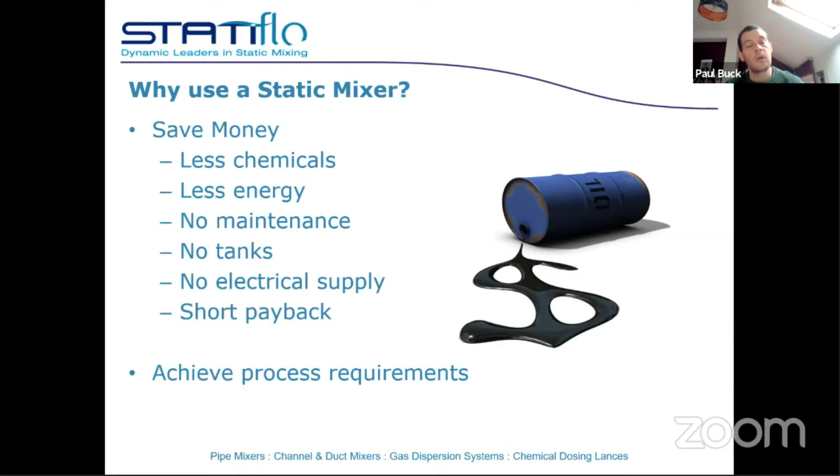Overall as well, it helps achieve the process requirements. By using a static mixer, you will better mix your chemical into your water, or your gas into your water, and you will achieve the process requirement quicker. So overall, there's a benefit there.

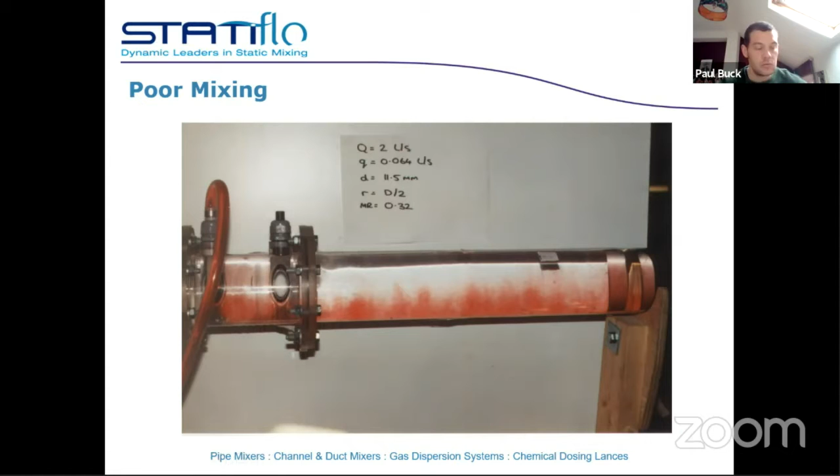Right, what we're demonstrating here is poor mixing. If you don't use any form of static mixer or gas dispersion system to mix your liquid or gas into the water, what tends to happen is you get poor mixing and chemical overdosing. So what we're demonstrating here is we're injecting a red dye into the pipe, and you can see the dye has dropped to the bottom of the pipe, with no mixing happening at the top. Overall, this is an inefficient system requiring more chemical consumption than when using a static mixer.

Now, focusing on this slide here, we've got two different images. Image one on the left-hand side is without a static mixer.

Without a static mixer, the red dye we've used is clumped together in the middle of the pipe and not properly mixed throughout the water. On the right-hand side, we have an image with a static mixer, and you can see that pipe is a nice even red colour through the full cross-sectional area. The static mixer has completely dispersed the chemical throughout the water, reducing chemical consumption and achieving your process requirements.

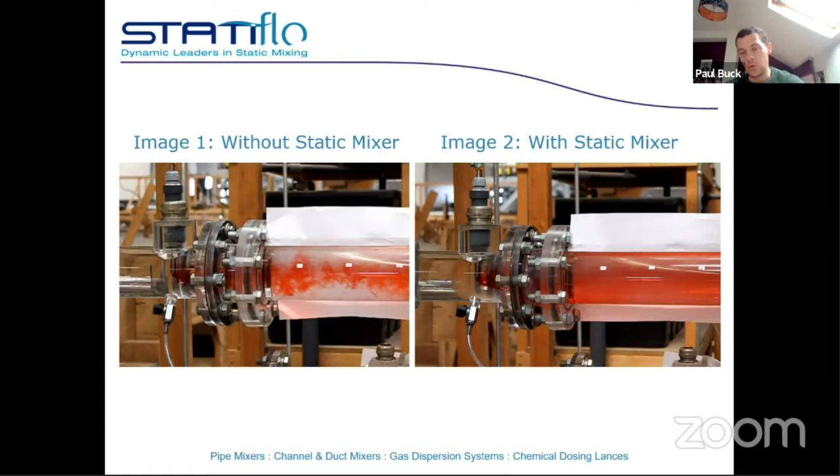Now, this is where you can use static mixers on different applications on a water treatment site. You have initially some pH control, so potentially acid or alkali being dosed. Then your coagulation phase, ferric sulfate, alum or PACl, you can use a static mixer there to mix these chemicals into the water. The gas dispersion system we're going to come on to shortly could be featured in two separate locations: aeration for iron removal, and also for ozonation. We're going to go into more detail with regards to the gas dispersion system for ozonation.

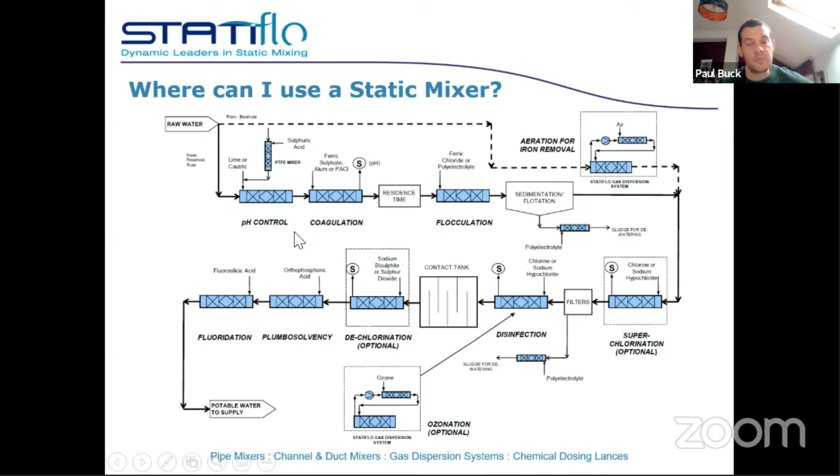Various other different mixers as well. We have mixers for polyelectrolyte into sludge, for sludge dewatering. Going into the disinfection stage, your static mixers can be used there as well for mixing your disinfection chemicals in, whether that be an actual chemical or an ozone gas. And then a few different applications depending on what part of the region of the world you are. Fluoridation is not done everywhere, and plumbosolvency, so orthophosphoric acid, is not also done everywhere.

Right, how do static mixers work? So the clue is in the name with static mixers - there are no moving parts in the mixer itself. The way that the mixer works is by flow division and radial mixing.

You can see on this slide here, on the left-hand side, we have a helical twisted mixing element. What this is doing is splitting the flow with the first mixing element, so 50% of the flow travels down this side, another 50% down the other side, and you get radial mixing happening at each element interface. The next mixing element is offset 90 degrees, and then flow division is happening again. So as well as the flow division, you get radial vortices created at each element interface, which also assists the mixing. So it's flow division, radial mixing.

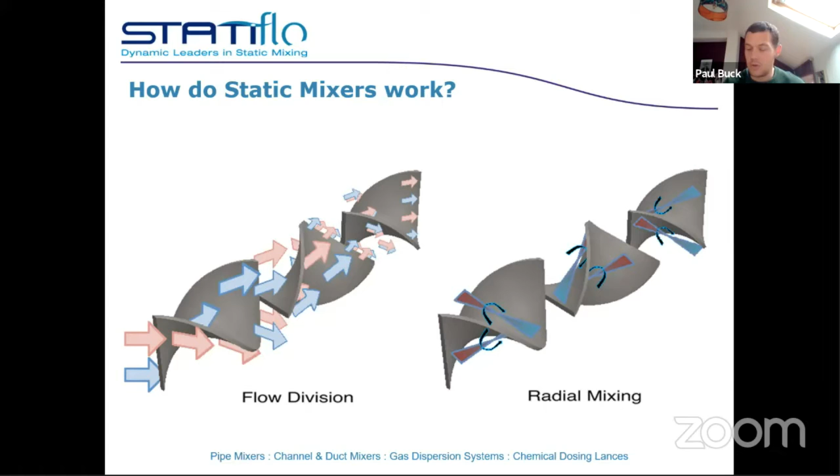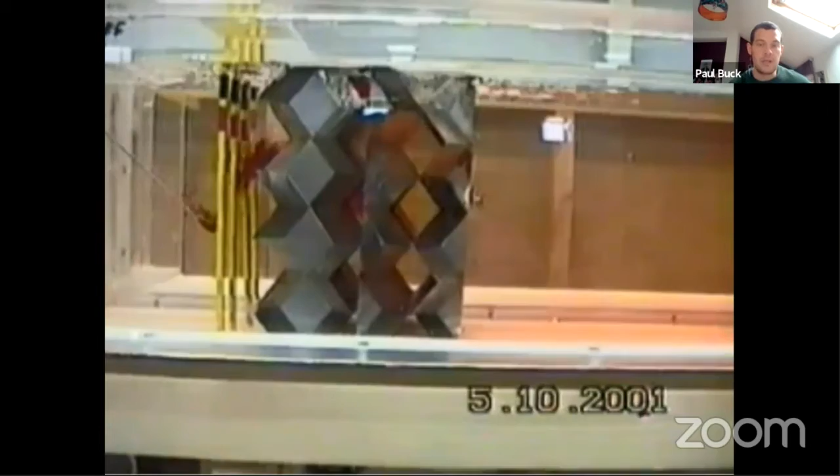Now I have actually got a video that I'm going to play here. This is just a demonstration video of how static mixers work in their performance. We've used a red dye again to simulate the dosed chemical. If I press play on this video, hopefully this works okay with the slight time lag. Normally the chemical will be dosed via the yellow injection lances at the upstream end. But what we've done here is just randomly dosed the chemical at different locations just to show the performance of the mixer is still very good. You can see a slightly better angle as the camera pans up here.

So that's your overall process. You can see the mixer is not moving itself - it's relying on the flow of the water through the mixer to divert that chemical, split the flow, and create radial vortices.

Right, what we're going to focus on now is some information with regards to ozone gas, and then specifically we're going to move into the gas dispersion system. So I think we've got an idea of how static mixers work now. Ozone has a very high oxidation potential, double that of chlorine, so it's very effective against a wide range of fungi, bacteria, and viruses. Ozone generators are also becoming more efficient - historically the power consumption was very high, but they are becoming more efficient. So ozone is being looked at around the world for disinfection purposes, as an alternative to chlorine. CapEx and OpEx costs are also lower than ever with regards to ozone systems as well.

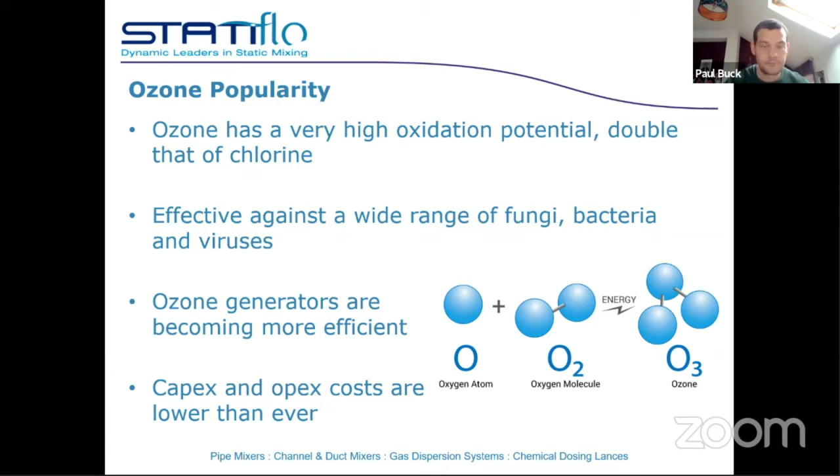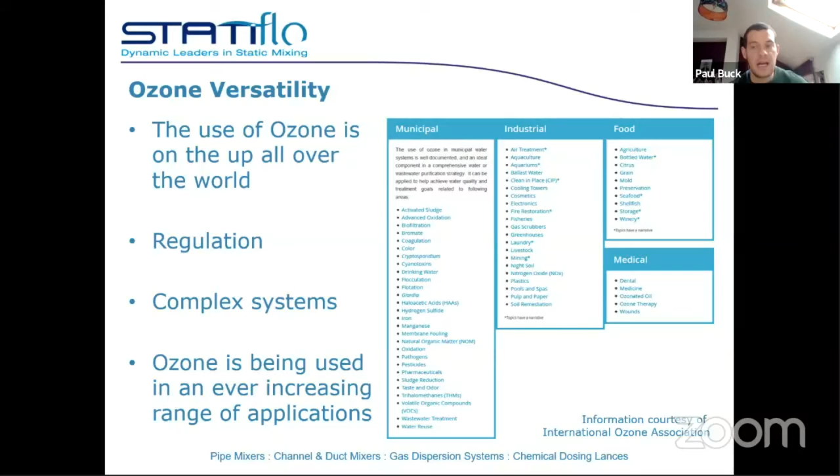It's important to have a good system to introduce your ozone gas into the water. Now what we're going to focus on here is some information on gas liquid mixing.

To start off with, if you were just going to use a standard static mixer, it provides a high shear rate, and the bubbles decrease in size as they pass through the mixer. You've got your main water flow rate, your ozone gas is introduced, and the bubble size decreases slightly with each mixing element, so the terminal bubble size is achieved at the mixer discharge. With a gas liquid mixing application, we're shearing the gas bubbles down to a small size, giving a higher surface area, and achieving greater mass transfer efficiency.

With just a standard single pass system, you do need quite a lot to generate that bubble size. One of the main advantages of the gas dispersion system is it takes off a proportion of the side flow, which is re-injected back into the main pipe.

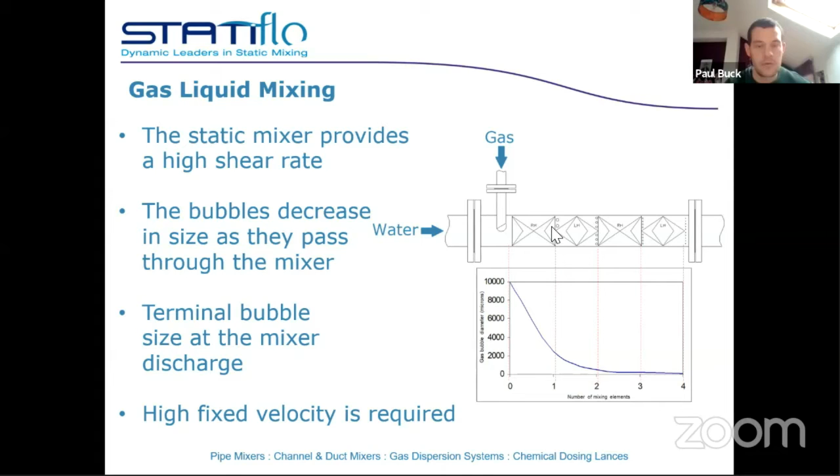If we just skip through to the next slide, this is what we're actually featuring here - our gas dispersion system. I'm going to talk you through the actual components of the system, and then there's another video that will play which will give you an idea of how the system works in operation.

As I mentioned previously, it's a two-stage static mixer system. You've got the main water flow rate, then roughly about 5% of the main flow is taken off via the side loop, with duty standby pumps positioned here. If one of the pumps fails, you can quickly switch over to the standby line. The purpose of this pump is purely to draw water from the main flow rate. Then the gas is introduced via a venturi.

The ozone gas is drawn in under low pressure. Then we have our first static mixer - remember, this is a two-stage static mixer system. The first static mixer shears down the gas bubbles to a small size, so you've got small, evenly sized gas bubbles, which are re-injected back into the main pipe where there's an additional contactor static mixer, distributing the gas bubbles over the full cross-section of the area. So, a two-stage mixing system here.

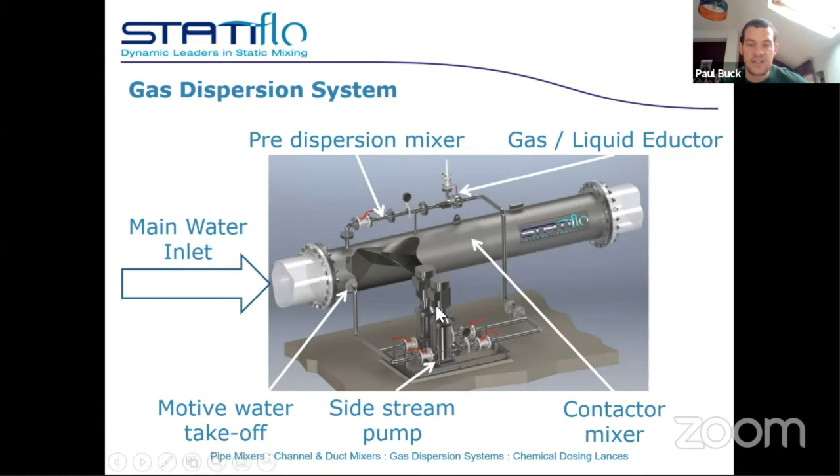Now what I'm going to do is play this video, because this will give you an overall idea of how the system works. I do hope that this video runs in real time - it may be slightly slow, but we'll see. I'll play the video anyway.

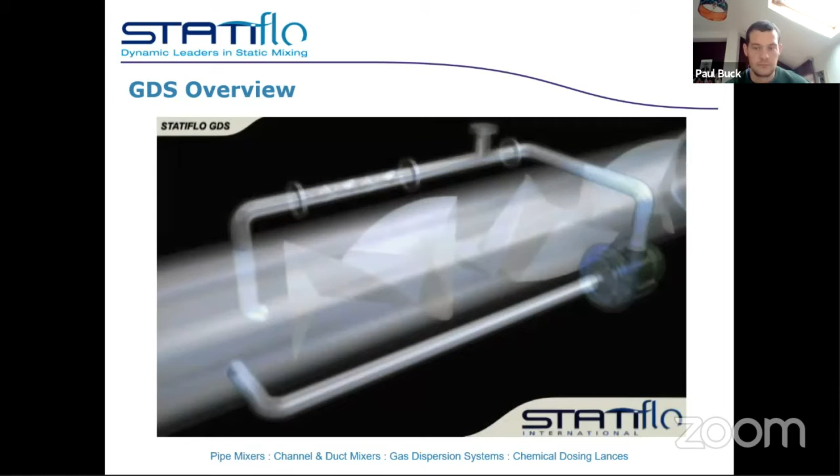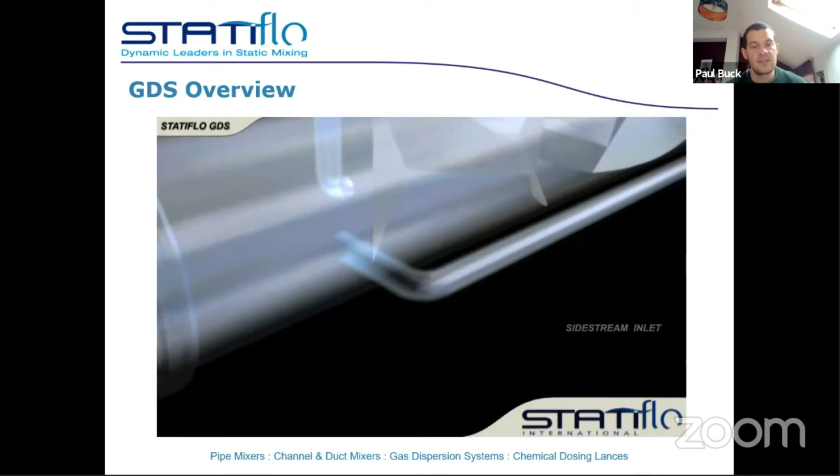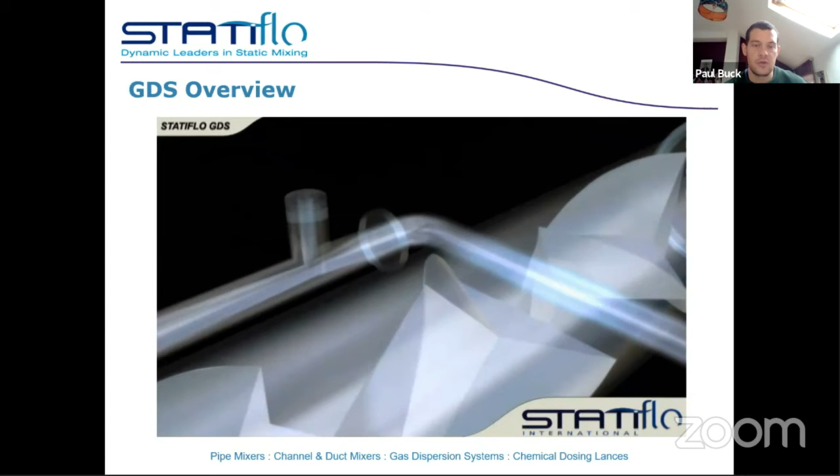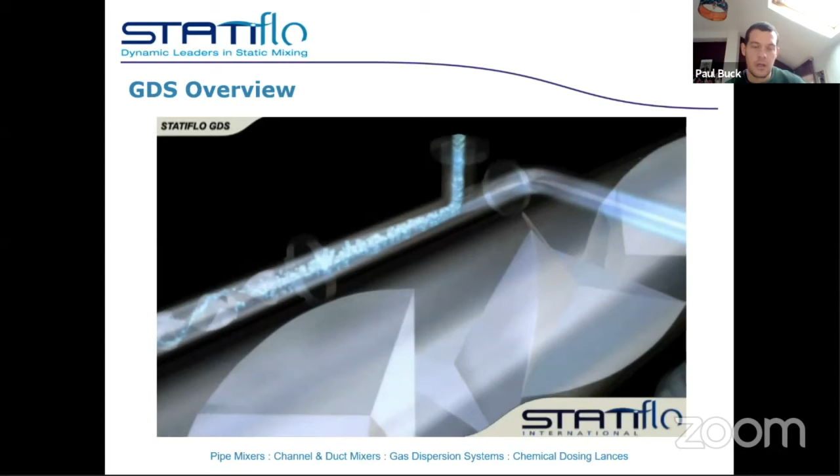So let's say main flow rate, then about 5% is taken off via the side loop, via the pump, if you remember from the previous slide. Gas is then introduced into the system via this gas venturi - the ozone gas. You can see we've got quite large, inconsistently sized bubbles. Then we have the pre-dispersion static mixer, which shears the gas bubbles down to a small, uniform, even size.

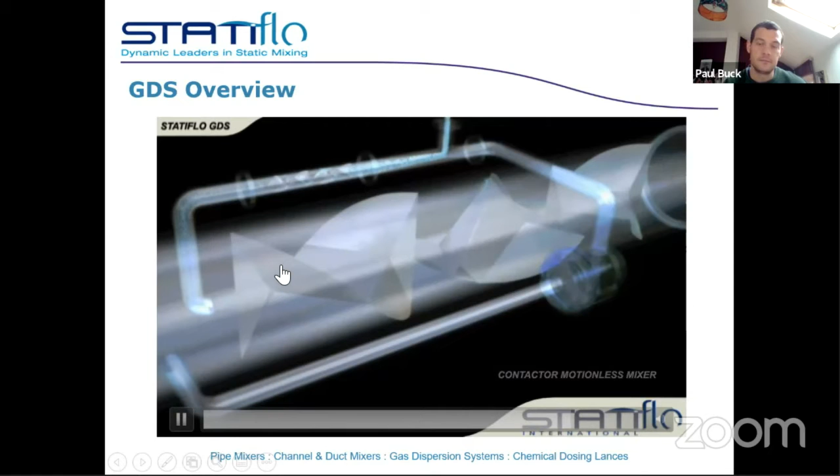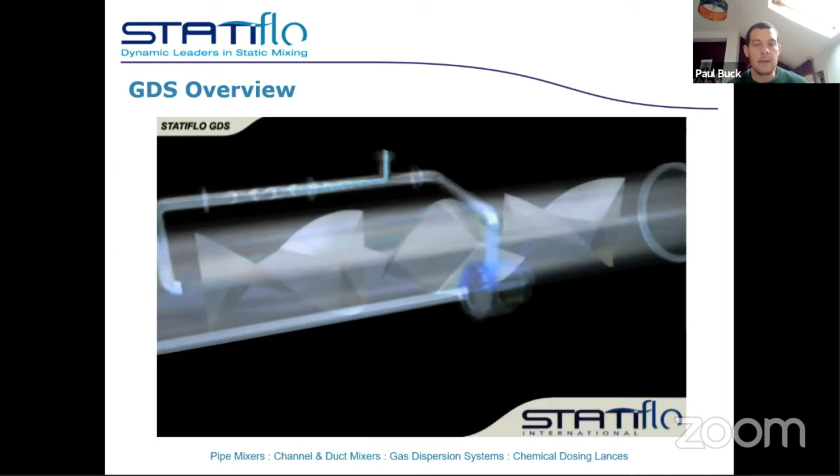Then this gas liquid rich side stream is re-injected back into the main pipe, into the main contactor, where there's an additional larger static mixer, mixing that gas liquid rich side stream into the full volume of water. So, a two-stage system. One of the main benefits is the gas bubble size can be maintained even with large variations in the main water flow rate. We're also achieving very small micron bubble size, so the mass transfer efficiency for the gas dispersion system for an ozone application is guaranteed at 95% - obviously a very high mass transfer efficiency.

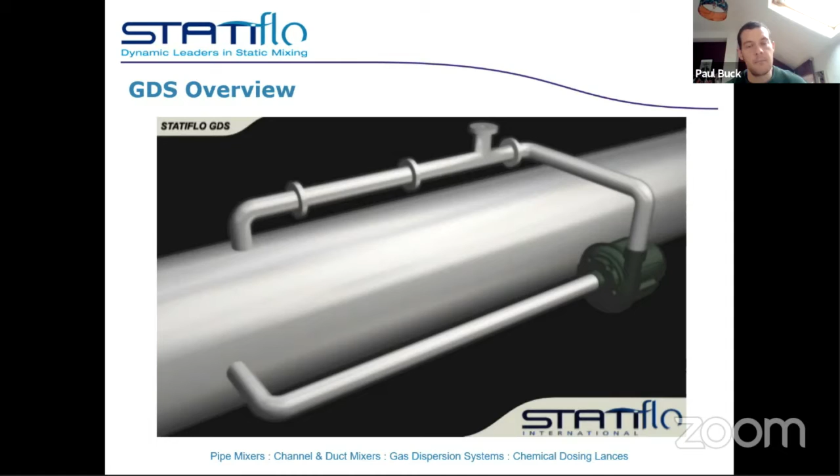Now, the way that the pre-dispersion mixer works, I'm just going to play this - there's another video embedded in here as well. This is how the static mixer shears the gas bubbles down to size. I'm going to play the video here. It's an animation, but it's a true concept.

You can see larger gas bubbles coming in, and they are broken down and sheared down via the static mixer elements, giving a consistent bubble size at the mixer discharge, leading to a higher mass transfer efficiency. I'll just play that one more time - you can see larger gas bubbles coming in, and they're sheared down to a small, evenly consistent size at the downstream end.

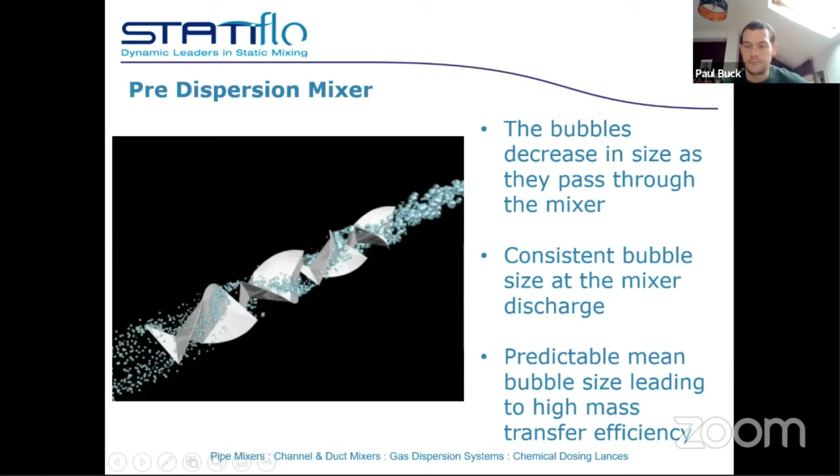Right, what we're going to look at now is some alternatives to the gas dispersion system. You may be aware of some of these alternatives here.

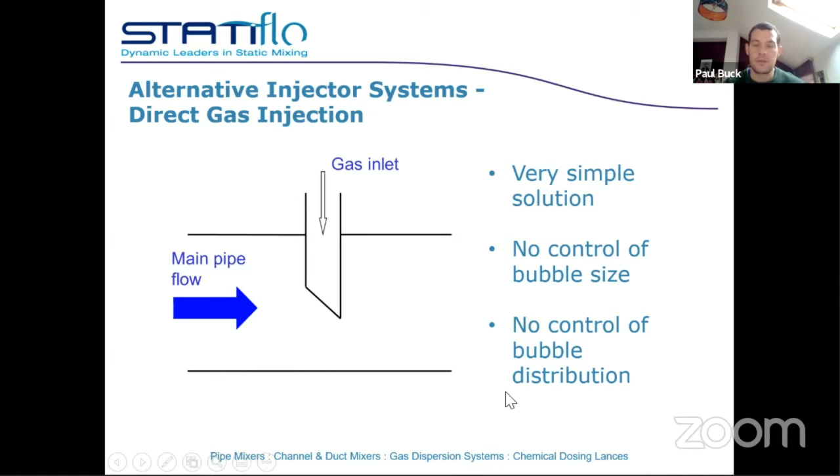Firstly, to start off with, there's direct gas injection without any static mixer. This is a very simple solution. There's no control over bubble size, and no control over bubble distribution. What tends to happen is the gas is introduced and goes straight to the top of the pipe, bouncing along it. That's a very inefficient system - you'll have water at the bottom of the pipe not being treated, giving a low mass transfer efficiency. Overall, quite a poor system.

The second alternative to the gas dispersion system would be gas diffusers. These are fairly basic solutions with no moving parts. They do generate relatively large bubbles. There's no mixing because the bubbles just rise directly above the column where they're released. The bubbles also recoalesce as they're released from the diffuser, and as soon as they recoalesce, they travel to the surface quicker, so you get a relatively short contact time.

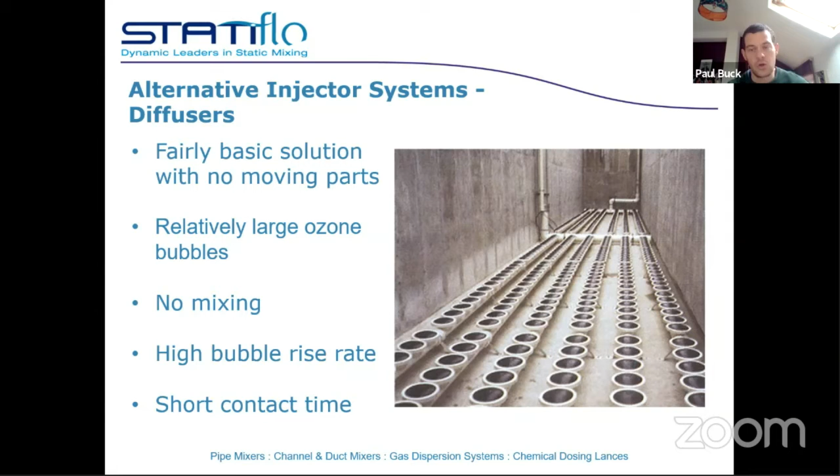Let's go on to the next slide - you'll be able to see what I'm talking about with regards to some diffusers. The bubbles released here coagulate together and rise very quickly, so you've got areas of water here, here, and here which aren't being treated. The bubble size also varies depending on flow, unlike the gas dispersion system which has a constant fixed bubble size. Diffusers also require quite high maintenance - the diffuser domes can become blocked with dirt and sediment, and they need regular shutdowns and acid wash requirements to keep them clean and functional.

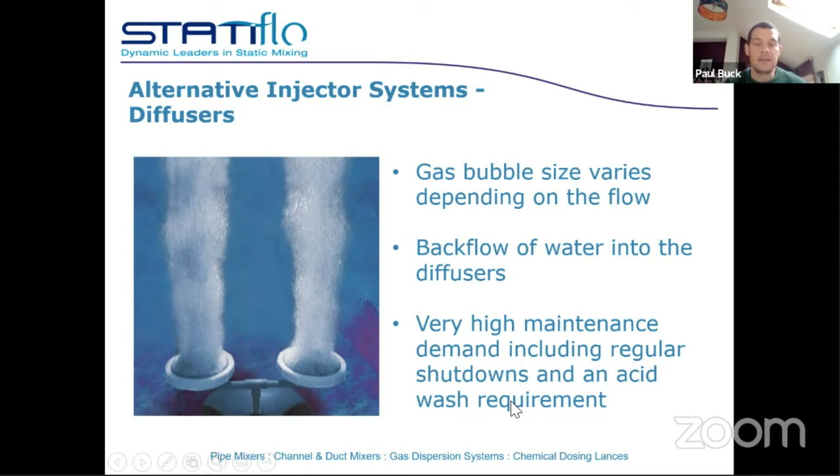Right, what we're going to look at here is a case study - gas diffusers versus the Statiflo gas dispersion system. This was a customer that contacted us in the Czech Republic in Europe. They had an ozone system using a diffuser bed. The initial mass transfer efficiency was 80%, but this dropped to approximately 60% after 6 months of operation. They weren't happy with the drop, because that meant they had to generate more ozone gas - a more expensive system to operate.

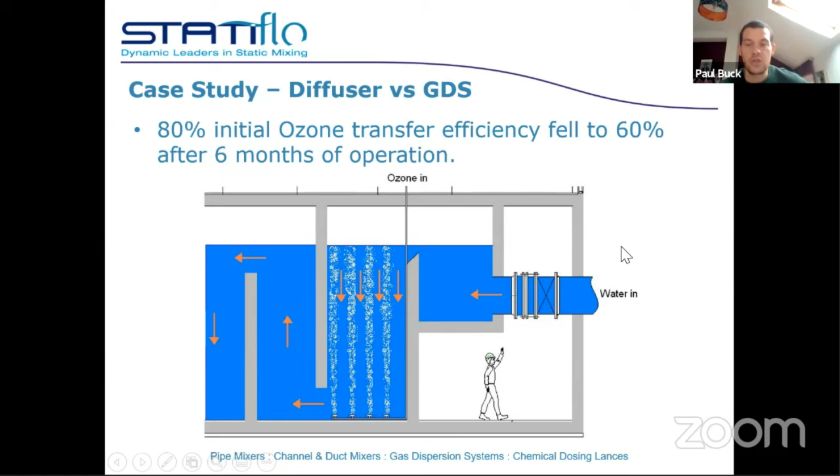So they contacted us about installing a gas dispersion system. What we did is come along and install it - the bones of the system were put in this chamber here. You can see that is your water takeoff, there is your pump, and you have your pre-dispersion mixers positioned here, followed by the secondary contactor static mixer. We also included stainless steel baffle plates here to increase the residence time through this chamber.

The mass transfer efficiency increased to 98.5% using the Statiflo gas dispersion system. This resulted in an ozone electrical generation saving of €150,000 per annum. So the customer managed to save that amount just by increasing the mass transfer efficiency to 98.5%, compared to the previously inefficient diffuser system.

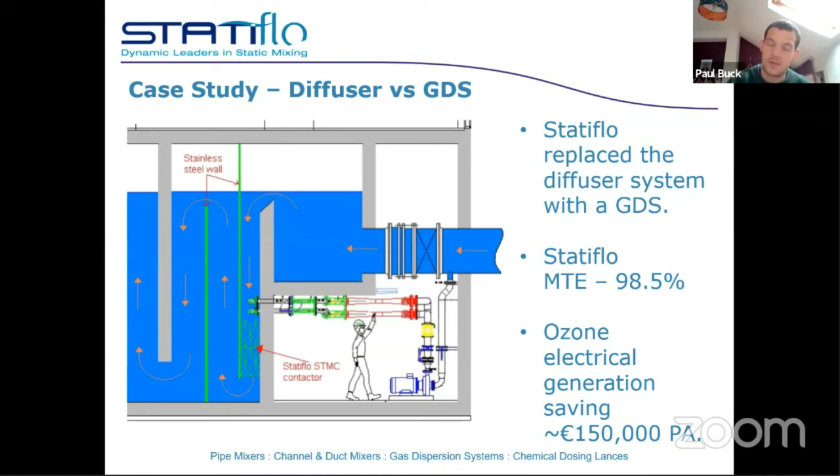This is an image of an installation in Spain. Just to give you an idea, the pipework can be mounted in various different options. There's a manway there just to check for blockages - this isn't always required, but you can see you've got your takeoff points there. There were 3 duty loops required on this system, so there's 3 pumps, pre-dispersion, static mixer, and then re-injected back into the main flow right there.

So, GDS benefits to recap: you get high performance over a wide flow rate range. Irrespective of the main flow rate through the main pipe, if this flow drops to be very low, the system will still perform very well because it has an independent side loop that runs at a fixed flow rate. So even with a drop in the main flow, you'll get high performance over a wide flow rate range.

Excellent transfer efficiency - we guarantee 95% based on good contact tank design. The lowest recorded mass transfer efficiency has been 98.3%, always higher than that 95% guaranteed figure. Overall, quite a low pressure drop as well - there is a pressure drop overcoming the main contactor mixer, however this is normally quite low. We can also tweak the design of the gas dispersion system to offer lower head loss, for example by making the mixer a bit longer to drop the head loss pressure drop.

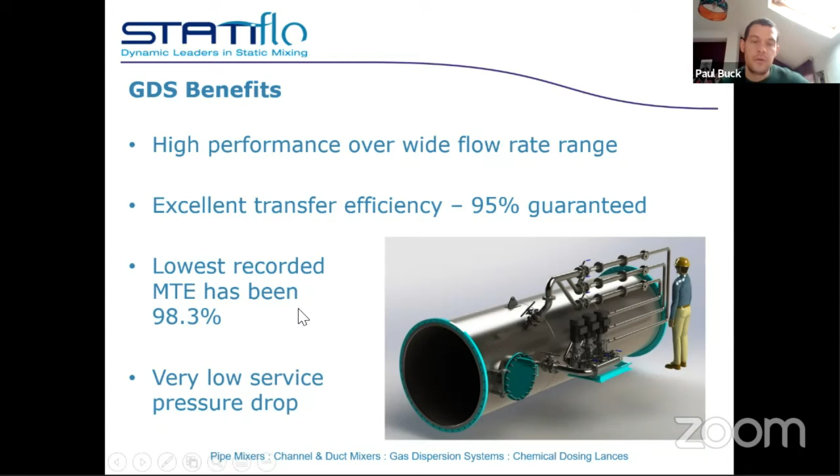Just some benefits continued. There's no deterioration of performance after prolonged use, unlike diffusers, which do deteriorate in performance over time. For a gas dispersion system, there's no deterioration over time. Everything is fine to be operated for a continuous period of time.

There's only one moving part, and that's the pump. Apart from the pump, the system has no other moving parts. That can be duty only, or we can have a duty standby pump. These are always quite low energy consumption pumps in comparison to a jet mixing system, which will have much higher power rated pumps. The gas dispersion system tends to feature a low energy consumption pump just to draw that water off. But all in all, it's very low energy consumption.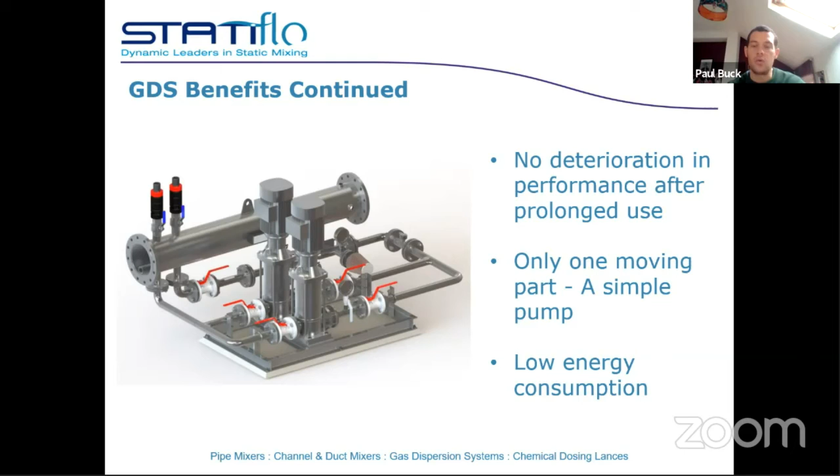It's worthwhile mentioning that the Statiflo gas dispersion system can be used for AOP, advanced oxidation process. AOPs can reduce the concentration of contaminants from 100s of ppm to less than 5 ppb. It's very straightforward to convert a GDS to also perform the advanced oxidation process. All we need to do is add a chemical dosing point and a mixer potentially upstream in order to add the hydrogen peroxide into the system as well.

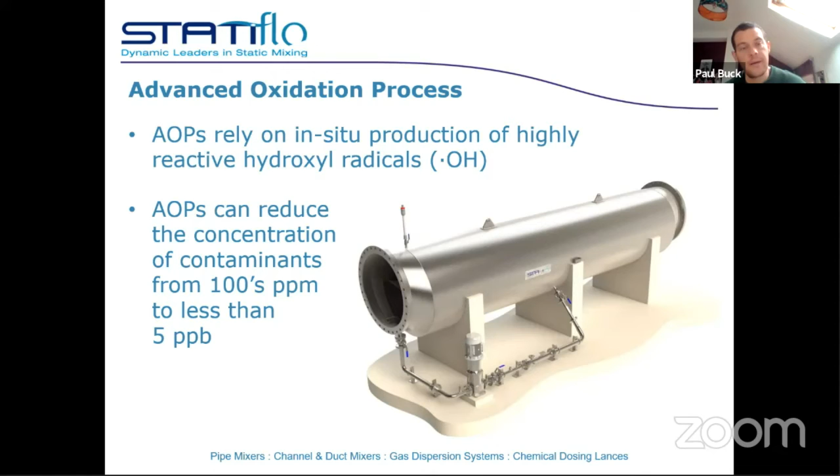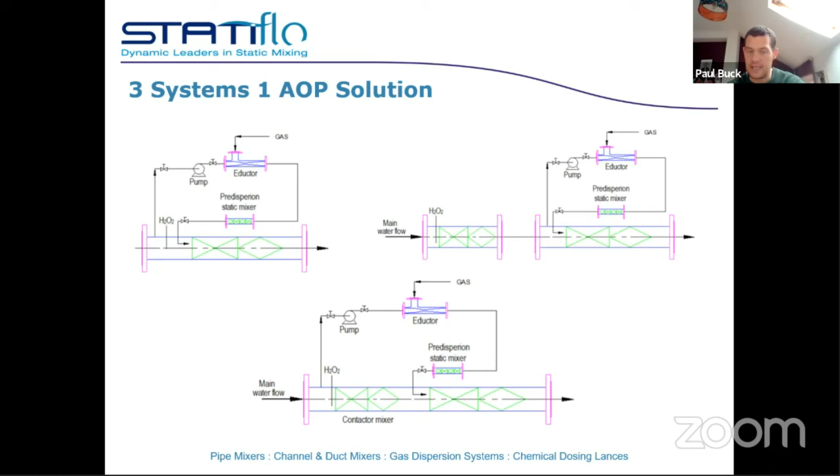And then the final solution is to have a two-stage system, but into one, really. So we're still dosing the hydrogen peroxide, and then there's a couple of static mixer elements before the ozone gas is introduced into the system.

So we can look at many different designs here. It all depends on space available, whether you would like to mix the hydrogen peroxide in first, or whether you prefer to mix the hydrogen peroxide and the ozone gas together. So many different options that we can look at for these systems as well. So when you're considering an ozone system, specifically the gas dispersion system, do remember that we can offer this as an AOP system as well.